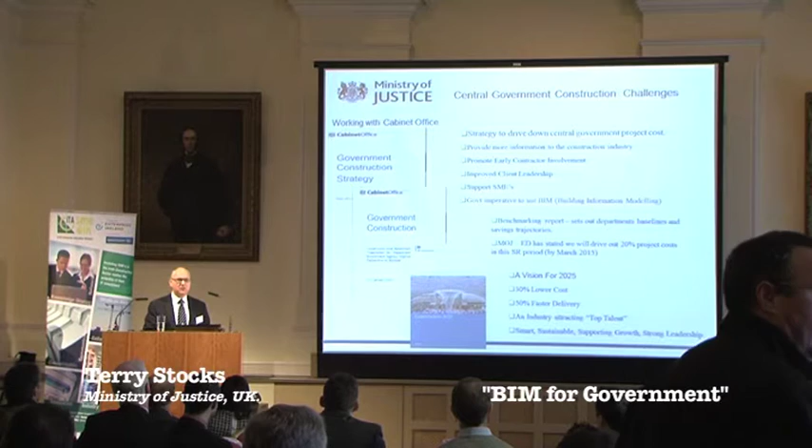To make sure we are doing what we say, we've had to give Cabinet Office and Treasury our forecast of spend reductions, our target spend forecasts over the spending review period. Within MOJ Estates Directorate, we've signed up for 20% reduction in our benchmark cost for project delivery.

Once a year, or twice a year I think, the government construction strategy delivers a benchmark report that reports on how government departments are doing against their targets, and that folds up into what we call our PECs, our Public Expenditure Committee Efficiency and Reform Group meetings, where our ministers sit round a table, and if we haven't done what we've said, they get it in the neck, so actually we get it in the neck. So there's an incentive all round to meet your targets.

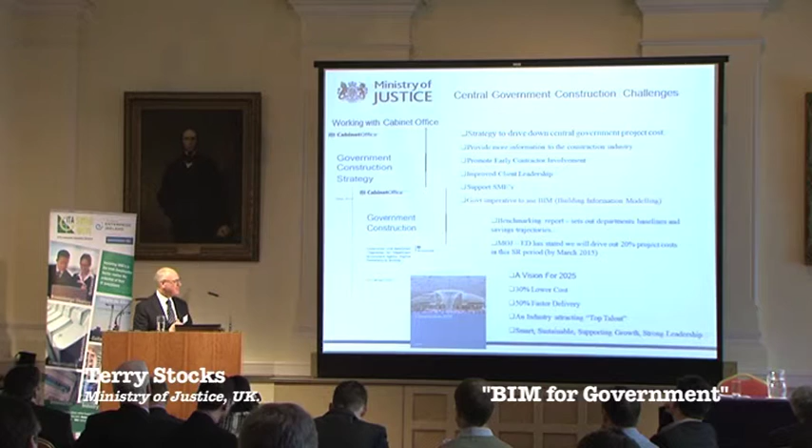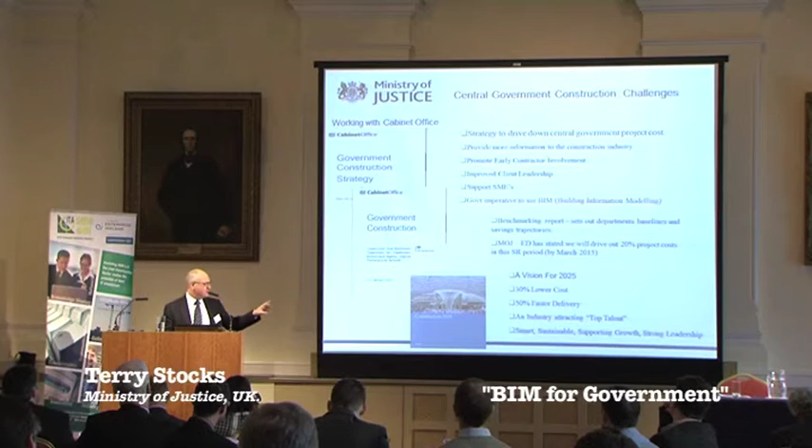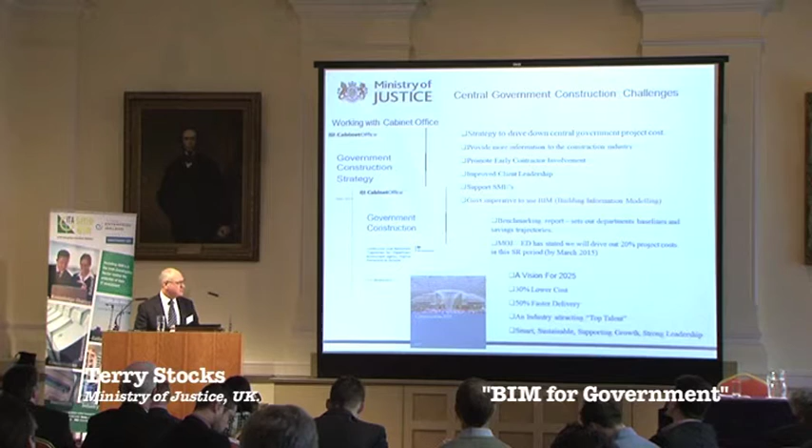What we're working on now as well, which is allied and carries on from the government construction strategy, is the Industrial Strategy for Construction 2025, a document brought together not only from government but also from private sector constructors, about driving 30% and more from whole life cycle and capital cost of projects, delivering them 50% faster, 50% greener, and also some stuff around reducing the deficit between trading of goods going out and coming back.

The UK BIM task group was set up to pick up the BIM mandate. It was to raise the awareness of BIM level 2. The group was put together to support key central government departments in implementing BIM, and to develop key guidance, documentation and case studies. So when they started, what was BIM level 2? We started with, now we've got key documentation in the PAS series and the BS series, digital plan of works that we're working on, and set presentations that we're running with departments.

So we're running alongside departments to build up their knowledge of BIM Level 2 and their capability. And we're also working with Cabinet Office to put in place a legacy support group as we move forward, because the funding for the BIM UK task force for Level 2 starts to wane at the end of this year.

So we're trying to get departments up to a point where they are starting to implement BIM. Then during 2015 they'll start to work on their own, so by 2016 they're in a position to run with BIM themselves, and the legacy organisation will then carry on the support.

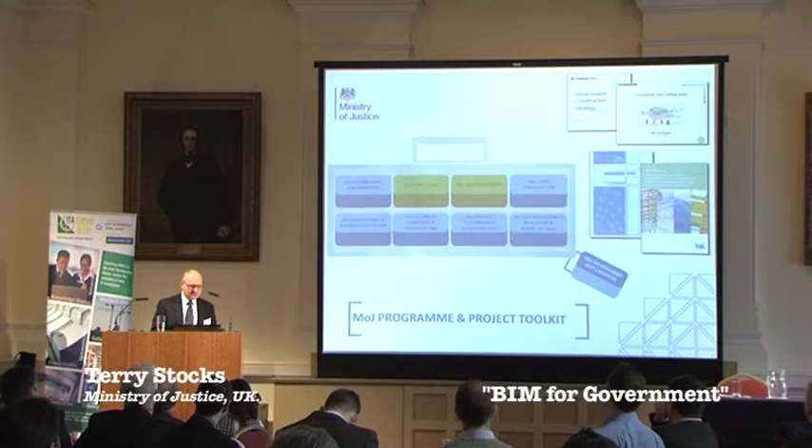So we've got a bit of a toolkit. We've set a toolkit out, lots of components. We've got our cost of component benchmarking, which I touched on there. We've got our libraries and our BIM program. We've got our lean construction program, which I'll touch on in a second. Lots of things that are all tied into driving down the cost of the asset for us to purchase and to operate.

So this is the sort of lean system of project management we've got. I'll run through this very quickly. We operate one version of the truth. We're quite prescriptive in the way that we want our programs put together. And then we measure those programs on a weekly basis, and the teams will tell us online how many activities they started against how many they said they would, how many they finished against how many they said they'd finish.

And we use what's called a buffered sort of program. So we put all the contingency effectively at the end. It's not rocket science, any of this. And when we reschedule the program on a weekly basis, we can measure how much contingency is being used. If it starts to be used at a slightly faster rate than we thought it would, we get our dots that start to go up into the red. If they start to go up into the red, we're actually collecting data as part of this.

Well, if you said you didn't do something, why didn't you do it? So you start to pick up reasons for delay. That means you can go back, you can start to do some intelligent analysis and root cause analysis around the reasons for delay. You can do an intervention, and you can see if you can get it back in the green. It's not rocket science, and contractors will tell you that they're doing it day in, day out. Some of them are, most of them are not.

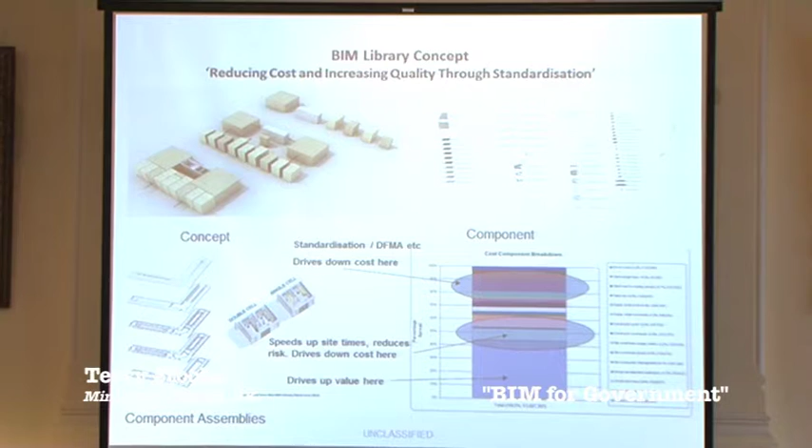That's been hugely successful. And we've got standard concepts for house blocks, for cells, and we've got our component library, just a rendition there on the top right. But all that is tied in to driving down costs so we get more money on the estate.

So you've got your standardised components, and you can start to sweat how you use it. You can use those components, for instance, with Google Earth. Recently, we downloaded, well, the guys do it regularly, but this was a particular project that I was involved in where we wanted to come up with some really quick options appraisals. So we downloaded a Google Earth image. There's a plugin that you can do which gives you a topographical view of the site.

You can't use it to build from, but it's good to make some early stage decisions. We could then use those standard components to start putting together the establishment that we wanted at the top. You can then drop that on your site, and very quickly, and I'm talking about 24 hours, you've got a site with a layout and a standardised building on it. If we can link cost into that, which is our next thing, you can start to get some really good early stage information to start to make some decisions.

You start to use some of your other applications, such as sun movement. You start to orientate it on the site very quickly. When you get to the model you want, you can send that over to your contractor, who then starts using that information to build his development projects on. And at the top right is the COBie data, where everything's stored, where that's where we can share our data.

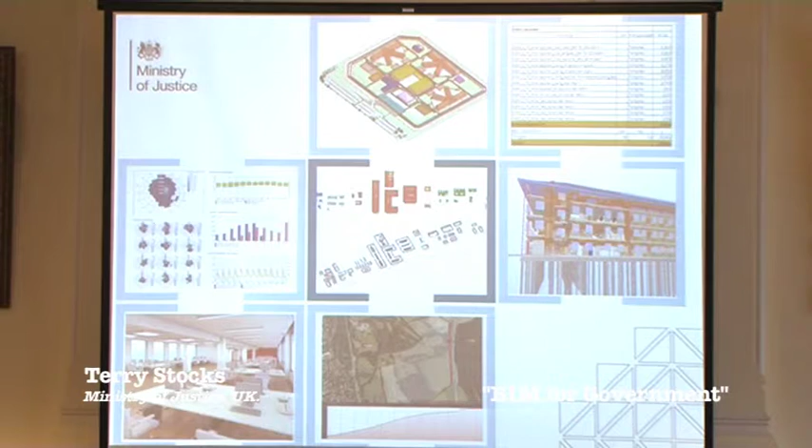That's where we can interrogate our requirements. And the bottom left is just, we're actually going through a major office redevelopment at the moment as well.

So we've used BIM on our office redevelopments, which means other government departments can use our standards that we started to build on office layouts as well. So this is our continuous improvement loop. We started off, our standards were specifications, drawings, technical notes. Very difficult to interrogate. You had one bit about ethos at the top, and then you had another bit about control and restraint somewhere else.

Very difficult to pile it all together. Well, what we've done now is take those, turn them into building information model elements, so cells, offices, classroom, roof structures. We can use those to put into our tender documents. We send those tender documents out now as a sort of rough model with information in it to our contractors. They've got a better level of information than we gave them before. There's a better understanding. They can assimilate what we want quicker.

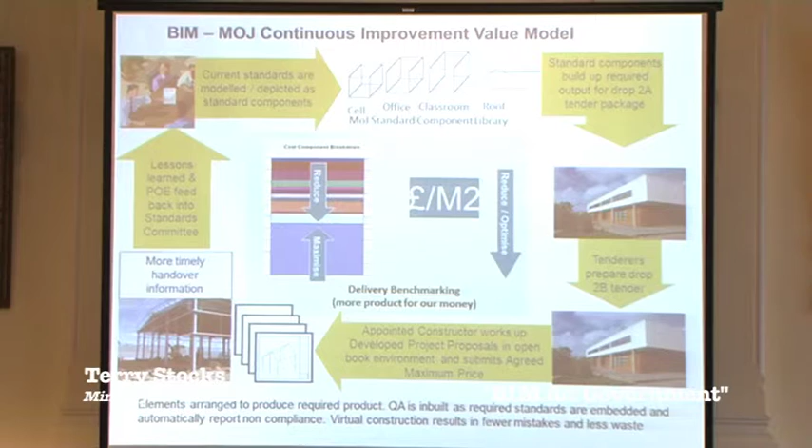So it means their tenders to us at the first stage are better. They're better informed. They then take that model, they build it up onto their developed stage where they can construct it on site. We get our handover documentation. We put it into the CAFM system. But then we do our post-occupancy evaluations, our lessons learned, and all that feeds back into the standardised libraries. So any lessons learned can go around again, any new innovations, any things that didn't work that we thought would work, we can change. Which then all is pushed to try and drive up the value of the asset, drive down the cost of procurement, and drive down the cost per metre squared.

Okay, Cookham Wood. How am I doing for time? Okay. Sorry, I told you I had a lot of slides, apologies. This is a really interesting slide.

So we're losing money every time we go from one phase to another. With BIM, you're getting that information in the model. So as I'm passing it, I'm passing you the information that I've got. More importantly, if you start to bring in soft landings, if you start to bring in the constructor at an early stage, you're getting the same team that's actually working on that information, building the information up, passing the information between themselves. A much better flow. You start to gain value hugely.

So with Cookham Wood, we had some really clear initiatives. We had lean principles that we wanted to make part of the project, which is on all our projects. We wanted to implement BIM. We wanted to bring in soft landings, two-stage tendering, early contractor involvement and specialist involvement, and also project bank accounts. So we were paying our SMEs at the same time as we paid our tier ones.

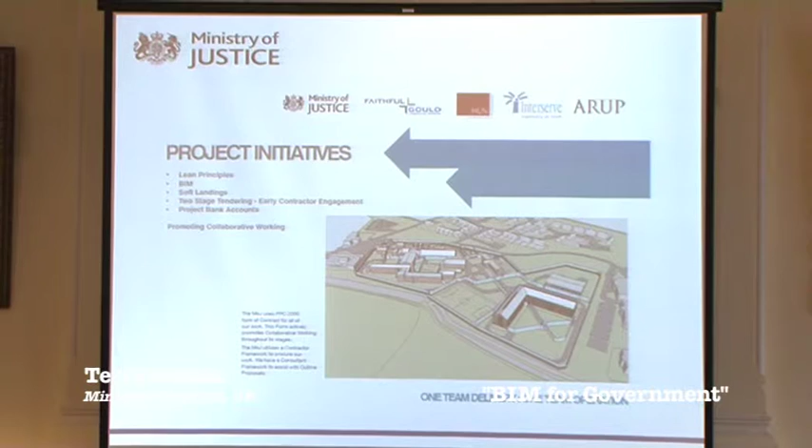There's a story in there, but it was efficient, it was really good, and I can assure you, when I sat the team down for Cookham Wood and said, hey guys, this is what we're going to do all this on this project, and they did look at me as though I was slightly mad, but it worked. It worked.

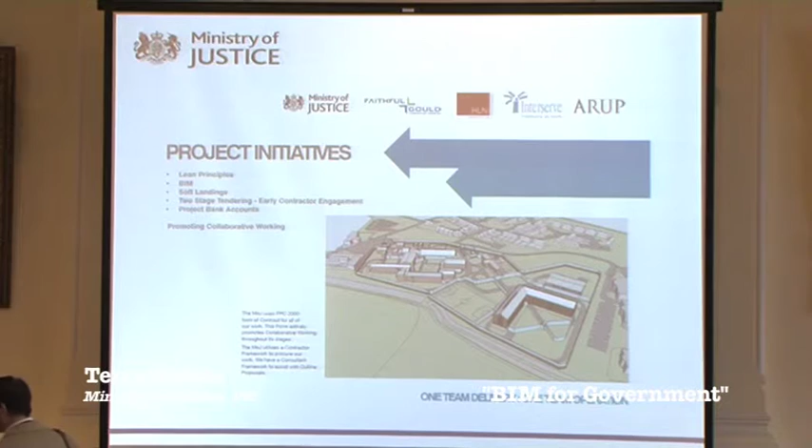Early contracting, early stakeholder engagement. Emily Thomas, she was the governor at Cookham Wood, and we sat down with her and her management team really early on when we were developing the BIM model. And she was able, as the statements round her say, and her team, to be able to understand what she was going to get. And some of those phrases that she said, the quotes: for the first time I could understand the building design, it allowed me to contribute and to comment. As, you know, I'm not good at understanding drawings, but with the ability to view what I was getting, it meant that when they went into the building for the first time, it felt as though they'd already been there. That's quite a strong statement.

But the real indictment to this is that we took about 800k out of our scoping document at the beginning, because we sat down and she said, I don't want that wall there. I don't need as many staircases as that you've put in.

Working with the end user, we were honing down what they were going to get. The only trouble is you start to get into too much detail - she didn't like the colour, the design team didn't like the colour of the worktops. So we had to say they're just indicative. But it's a small price to pay for being able to share what you're providing to your client base, especially if they're not construction experts. So why wouldn't you do this? If you're buying something, why wouldn't you want a BIM model to see what you're buying? It's quite powerful stuff.

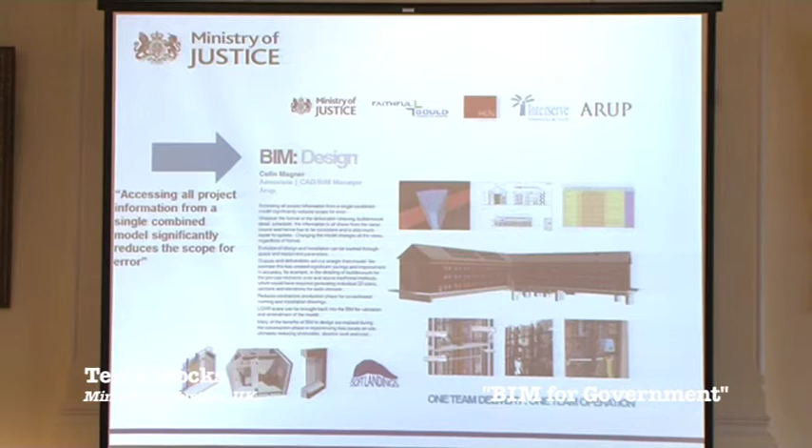It's really worth thinking about.

Colin facilitated the design team meetings. You can see one of the design team meetings - they had the federated model up and were using it to review as a team, because you can see the clashes there. They'd run the clash detection, run the routines to say are we providing what the client wants, and in a 3D interactive model they were making things better. That design effort, on the larger scale, is a graph we all know and love: the later you make a change, the more it costs you, or the less value you get into the project.

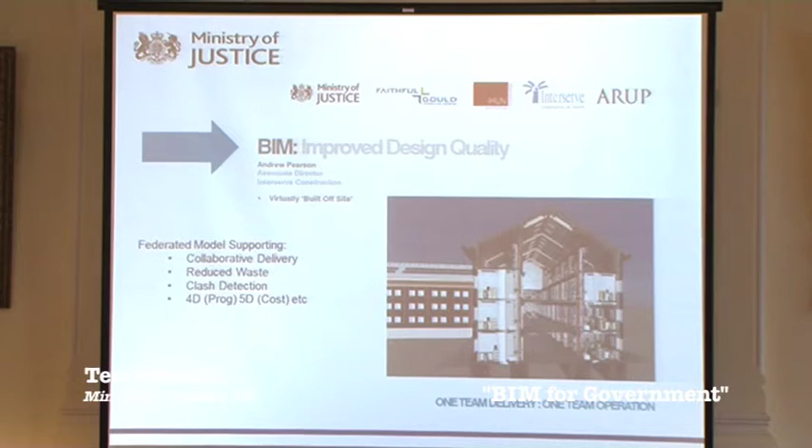So this was the sort of model we built before we started on site. Andy, Andrew Pearson, would say we built the project twice. We built it once in digital format, where we made the mistakes and put them right, and then we built it once on site. There were still some mistakes we made on site, of course, but I think the amount of rework we had was far less than we would have had, because we built it virtually first.

We were using precast panels. Had the door come in the precast panel, it would have been very difficult to change where the door is. The guys wouldn't have noticed that it hit the door until they started to put the air handling duct up. So what do you do? You have to scratch your head and figure out what to do, then put a kink in your air handling gear, which then needs to be redesigned to see if it's a hindrance to airflow.

You need to get your offsets manufactured. Then that probably crashes into one of your other M&E systems, your pipe work, so you need to shovel that across. Before you come to site, we could just move the door over, or move the duct over, so by the time it gets to site, we're not going to get the clash. It's obvious, but it really does drive out cost.

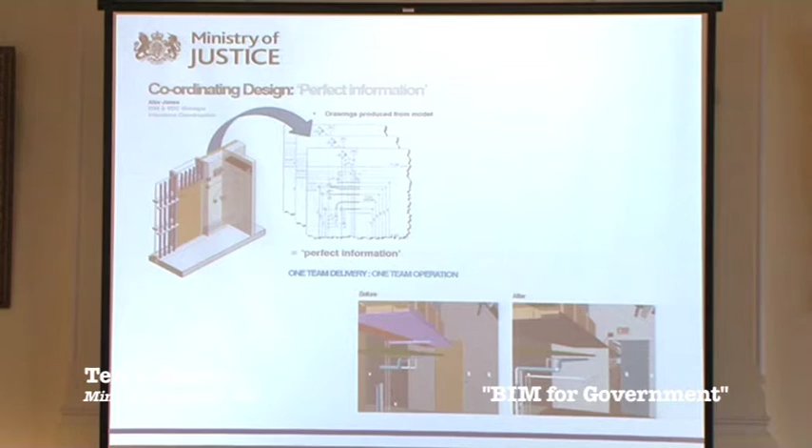In a BIM environment, you get that clash. You know whether the bolts you're putting in, your rebar that's going to hold your security metalwork, is going to crash through where you've put your cast-ins for your M&E boxes. It just takes out the error. This is another one from the contractors, who started to think about 2D, 3D.

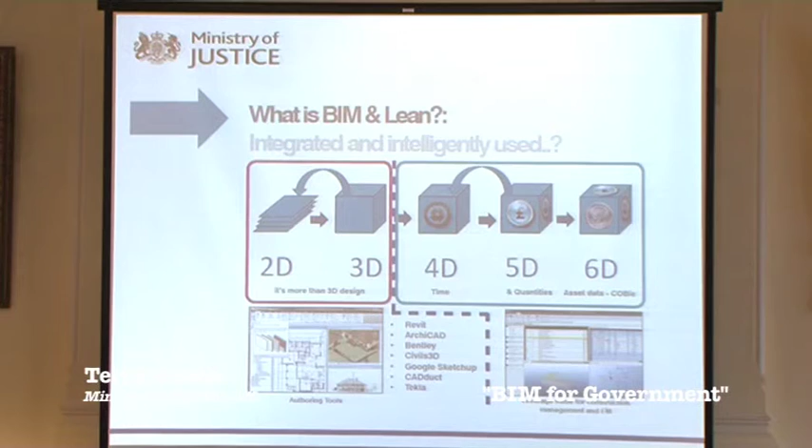But then about 4D, 5D - about time, about trying to bring quantities into the model. So they started to use it to break down in elemental format and create their own bill of quantities from the model. They then started to do automatic takeoffs, putting costs in with that. Their view is that as they develop this, they'll be able to get their tender pricing much better than now - much more automated, much quicker, because they've got this library of information and quantities. So contractors are really starting to see the benefit of this.

That's 2 minutes, okay, great. I'm going to go very quickly. This is just one of the meetings we had on site with the subcontractors - weekly meetings - because we wanted the contractors engaged.

In here are the scaffolding foreman, the crane driver - they're actually working together to do a forward look for the next week, and they meet daily in huddles as they do. This is about engaging the workforce.

Here I just wanted to show this is where our COBie drop is, and we're actually now getting our COBie drops and automatically completing our FM systems, operational systems, when we finish the job. Before, we had to take the information and manually upload it onto the FM system - we're doing that automatically now.

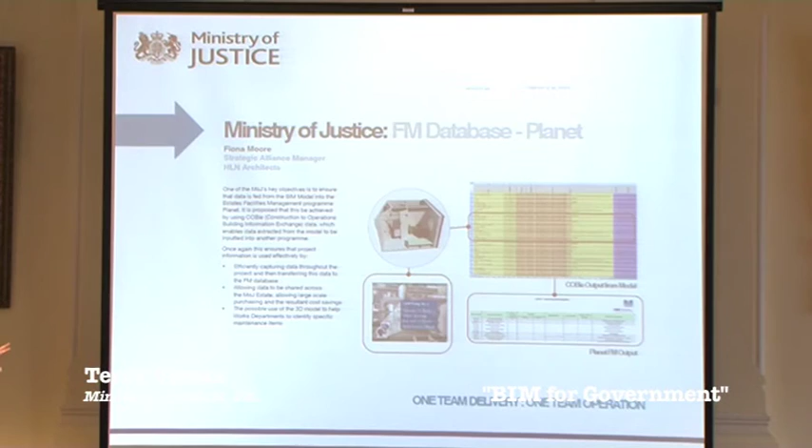I'm going to skip through those. So at Cookham Wood, we independently verified that we made sort of 20% savings.

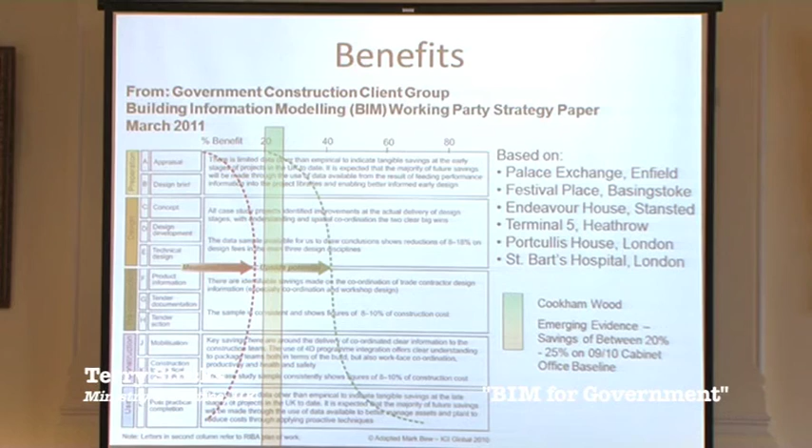The red dot is some work that was done on pilot projects before we got on board, and that included St Bart's Hospital in London - that's their measured savings from BIM. The green line is what they thought they might get once we became mature. The tower is rather simplistically where I put in our 20% saving at Cookham Wood. This is the report on the website that independently verifies the savings we made at Cookham Wood.

In summary, we've got a lean project management system in place. We've been by default now within MOJ. We've got benchmark targets established, which we are setting and ramping up year on year. We've made our 20% cost reductions. Last year we delivered 23% on our 09/10 benchmarks. And we've got a 15% increased proportion of our pound now going on our asset rather than on the procurement of that asset. And we've got a big forward pipeline.

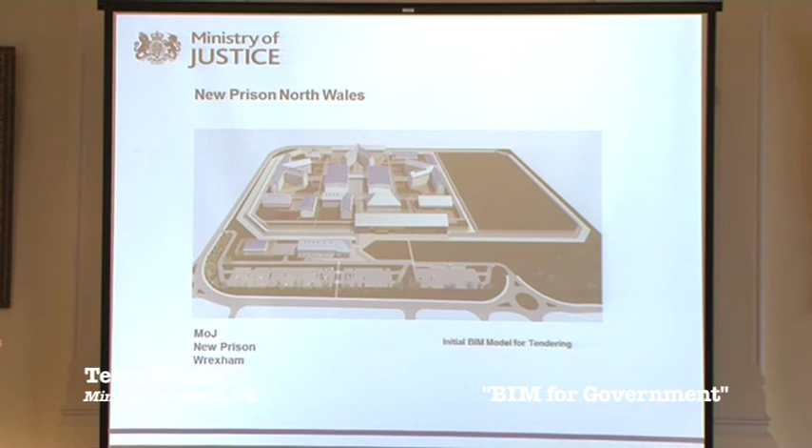These are just some of the models we've got currently in play at the moment. This is a major new development - a £260 million new prison in Wrexham, which is actually going to use asset tagging to ease the FM operation as well. So that's it. Thank you.